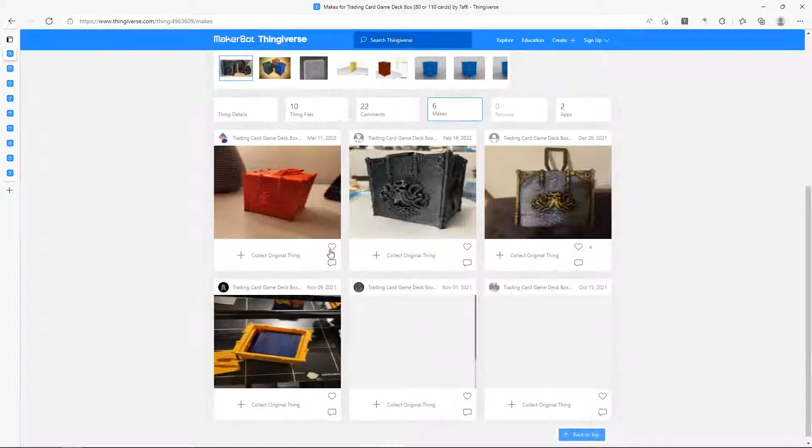So, anyway, we got this cool Cthulhu style one. This I thought was pretty nifty. It's a little briefcase. Oh, and this is the other reason why I have these up. If possible, I would like to have a section in our deck box for holding dice and chips and whatnot. So that is something to keep in mind for our design. One of our design goals, if possible. It's not mission critical, but if possible.

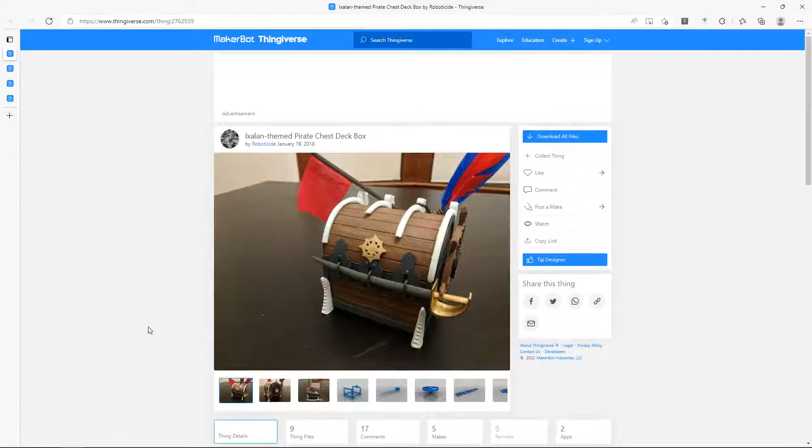I believe the Spellbook also had cutouts for your thumbs, if I remember correctly. It did not. Okay. Oh, it did. Sorry. It did right here. This cutout right here so that you can get to it. So that's something else we might need to think about, although the way I'm thinking about it, and we'll get to it when we look at the other ones, it's not quite the same, and probably not going to be an issue.

Here's a nice pirate deck box one. And this is, for example, one of the reasons why we may not have an issue. You see how the cards are sticking up out of the deck box so you can grab them above the deck box line.

That may be what we're looking at when we make our own, but we'll see where that comes from. Here's a nice one. Little bit of electrical work in here, you know, just an LED. It's a nifty idea. It might be something we might want to look at, including some electronics, although again, that's not a mission critical one, so not very worried about it.

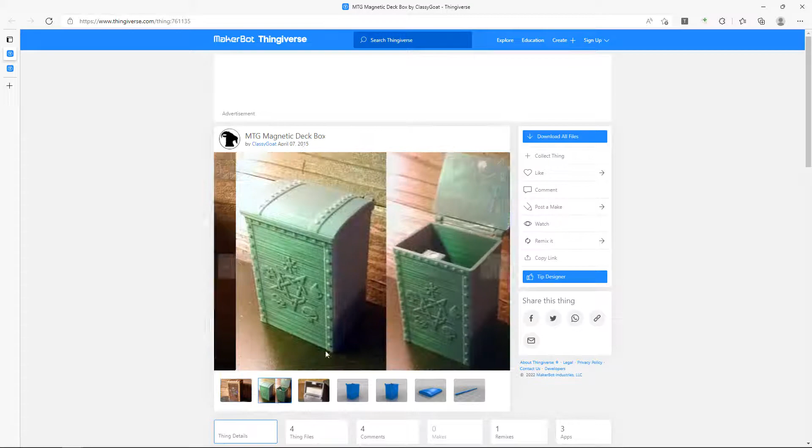And then I have this one up here, even though this is pretty simplistic, just because of two things. One, the magnet here to keep it closed. That's something we can think about. We can think about including magnets.

And two, one of these things with painting 3D prints, it doesn't always turn out well. This one happens to look alright because the design is wood. But I'm going to avoid painting our deck box because, frankly, in theory, we could do a wood type design for the 3D printed mechanism, but it's probably not going to happen. So I'm not expecting to be painting this.

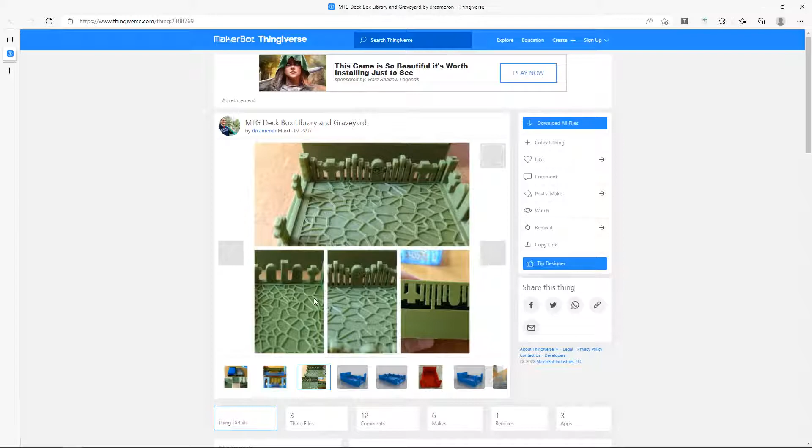And then I really like this one just for the theme. So over here, let's get another design. One, it pieces together into enclose, which is kind of nifty, but on the left hand side you have your library, and then on your right hand side you have your graveyard. So I thought that was a really nice idea. drcameron, I really like that idea.

If you're looking for a deck box that's simpler, by all means, I'd consider. I mean, if I was going to print one and not make my own, I'd print this one. This one is, I think, a very aesthetically pleasing deck box. Not as intricate as, for example, the Cthulhu one. The Cthulhu one would probably have been my second print. But it's functional while also being aesthetic without being overbearing like the artistically designed one.

So those are those ones, and this is the one that we are inspired by. I don't know if this is the exact print that I printed. There is a redesigned one that's a larger size. I may have printed that one, but this is what inspired me. I saw this one, I was like, ooh, this is cool and nifty, and then frankly I printed it out and was a bit underwhelmed by it. But this is what we're going off of.

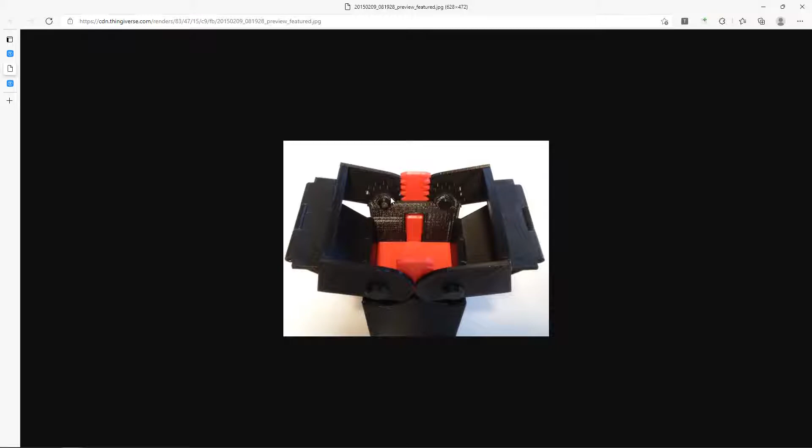So as you can see, what's the best picture? Yeah, I have this one up just in case it was a little easier to see, but I don't know that you necessarily, because of the black, are able to see it as well. But basically, the lid has gears on it. These gears drive this rack, which in turn raises the deck up out of the box. It is a nifty design. I do like it. It's just a little underwhelming compared to what I was looking for.

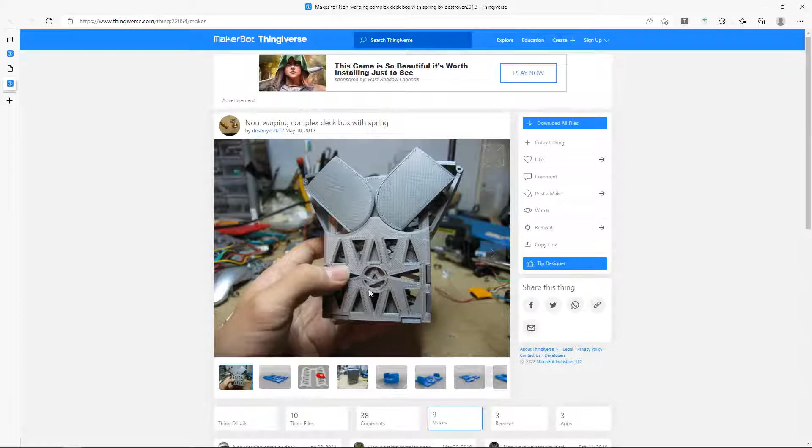And then the last thing here is this one, which I wanted to include because this is probably how we're going to be doing the outer case. We're going to have some see-through parts so that you can see the mechanism working, because the problem I have with this guy is that you don't really see it functioning as you're opening it up, which takes away from it. So this guy, on the other hand, you can see it functioning, which is nicer. So that is all our prep work out of the way, just giving you an idea.

Whoops, ignore that. I'm on desktop right now. So, oh, and I haven't opened up Fusion. So you're gonna see everything on the desktop. Let's see that desktop instead. So Fusion. Just getting Fusion open because I forgot.

Taking a drink of the coffee. Interesting thing is, I'm looking at my stream. Well, not my actual stream, but the preview. Give me half a second. I'm curious whether or not my music's actually getting through the stream. Yeah, okay, it is. My streaming software, I'm not seeing the music play, but okay, now it's updating. Now it's saying that the music's playing on my streaming software. Alright, cool.

Good deal. Now Fusion, where are you at? Why aren't you open yet? Alright, there we go. There's Fusion. Good deal. Now let's hop over to Fusion.

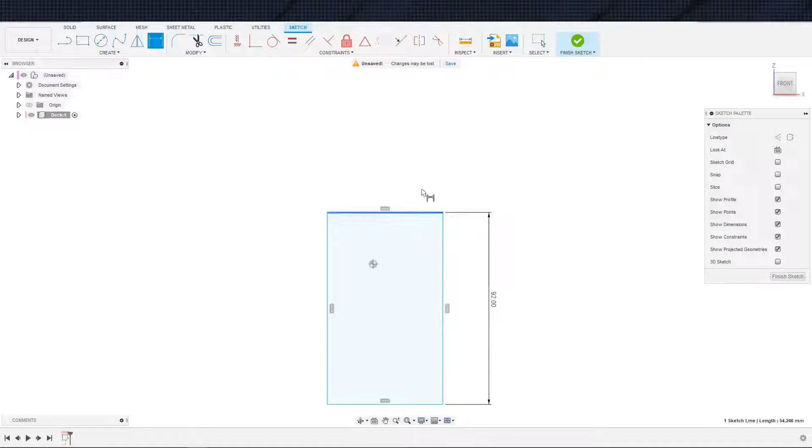A card with the sleeve, and I probably should know this from all the playing I've done, but it's been a while. So with the sleeve, I'm getting about 92 millimeter by, let's round that up to 66.5, and that was obviously height by, how do we want to do this? Which face do we want to start out with? I guess the front. So this is 92 by 66.5. Height by width, 66.5. And center this guy on there.

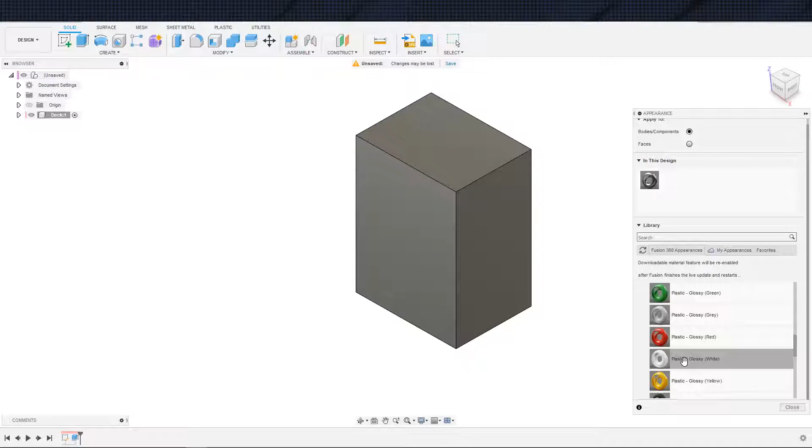And let's look at, so this is a standard 60, or yeah, Magic is 60, right? 40 is Yu-Gi-Oh! So 60 card deck, we're looking at 35 millimeters, let's call it 50 millimeters just for extra cards. So I'm going to have this deck proxy be 50 millimeters deep. And paper, do we got paper in here? No? Alright, I guess we're plastic today. What color do we want? Opaque. Let's do blue. Alright, there's our deck proxy. Step 1 achieved.

So a couple things to think about. Thickness of the gears. Do we want to do 3 or 5 millimeters? I'm gonna go grab something, 1 second. And let's hop over to the camera.

So here's the version I printed out. That is my EDH deck. It is an EDH deck as opposed to a Highlander or a Commander deck, because Commander did not exist when I made that deck. So 3.5 millimeters is what they made the thickness on these gears, it looks like. And there's just your example of how this one works. And that creaking noise is because I used paper clips instead of pins. I didn't have any brad nails, is what I believe they suggested. But as you can see, rack and pinion, lowers the floor, etc.

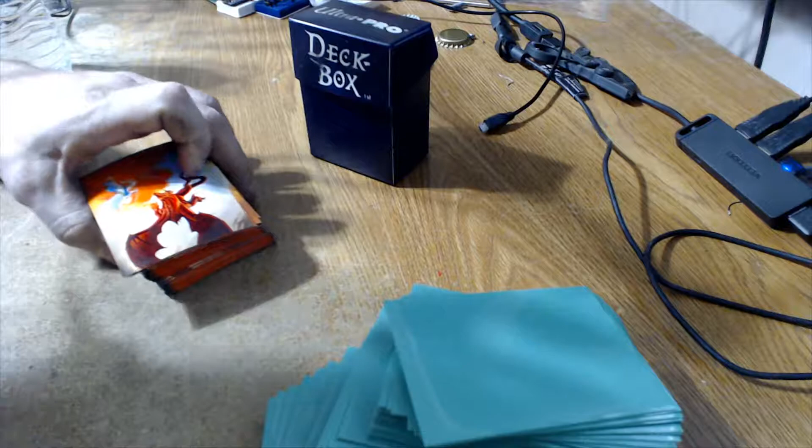So we said 3.5 is a good thickness for the gears. That's what the other one uses, and frankly they feel sturdy enough, so I will stick at, well, probably could get away with 3. Probably just round it down to 3 if we wanted to, but for right now, nominally, we'll be sticking with 3.5. So that is where we're at with that.

The next question is, let's make our deck box. How exactly do we go about arranging this? So there's 2 different orientations we can do, right? Three. There's three, obviously. Z, up and down, so having the deck standing up and down like the example is. Turn it on the side, that would be like the pirate box. The pirate box was on the side like this. And we also have it laying down like this.

I think that's right. Anyway, actually, the orientation that I'm thinking of is actually like this. Come on, click, click. Like that. And the reason I would use this orientation is because it is like a puzzle box. Puzzle boxes tend to be widest: longest measurement is width, second longest measurement is depth, and then the shortest measurement is height. A lot of them are in that rectangular shape.

And actually, while I have my EDH deck here, let me just double check the thickness of it, because this feels a lot thicker than what I said. So this is 55 millimeters thick. And what do we say for this deck box? 50. Okay, so I'm going to turn this to 60 then, to give ourselves an extra 5 millimeters.

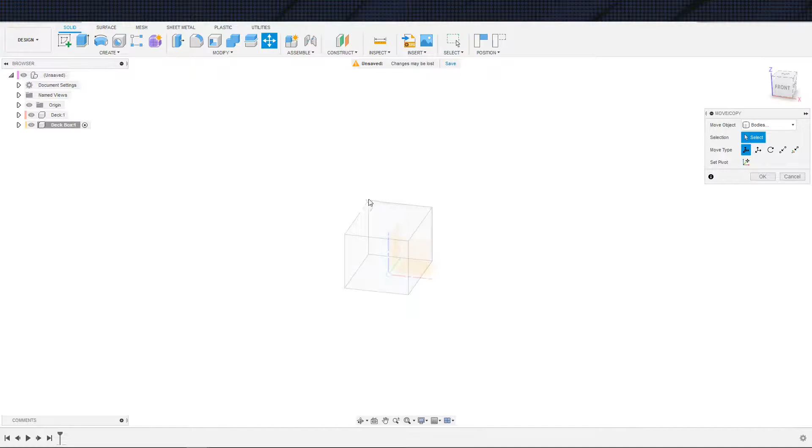Yeah, I think we're going to start off with the premise that this deck box is going to be oriented the other way. So let's align this. I guess we just grab it like that. Orientation. There it is. That's what I want. Alright, so this is now in the orientation that I'm looking for. No, it's not, I take that back. Let's rotate this really quick around the axis there, 90. That does not appear to be what I was looking for. Control Z.

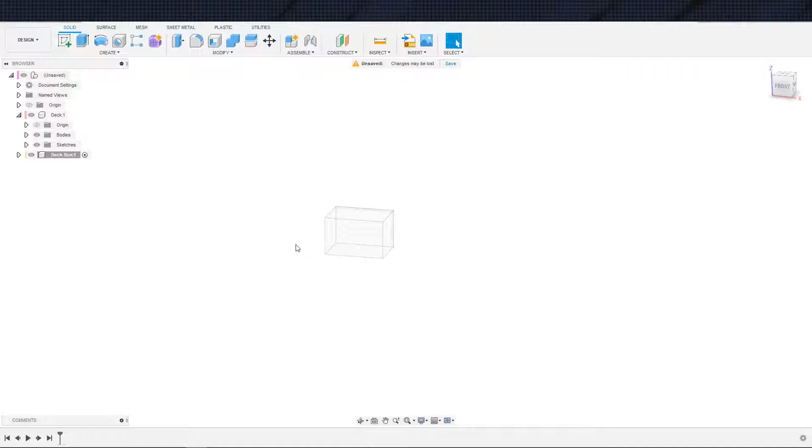Components. Select that. Around the axis. There we go. 90. Much better. So there's our front. And let's check the origin here. Its origin is still in the same plane as our main origin, so we are looking good. And capture position. Alright, so again, I didn't put much thought into how exactly we're going to be doing this one, so let's see.

So puzzle boxes very often have sliding sides, which are required to open up, and the slides block each other. And then I wanted to include gears and stuff for the mechanisms. Actually, those are two different designs, so we're gonna pick one, and I'm gonna go with the mechanical design. So let's see if I incorporate the dice chamber. Let's say I put the dice chamber on this side. Which way do I want to design it? I guess it makes most sense to do it on this side here.

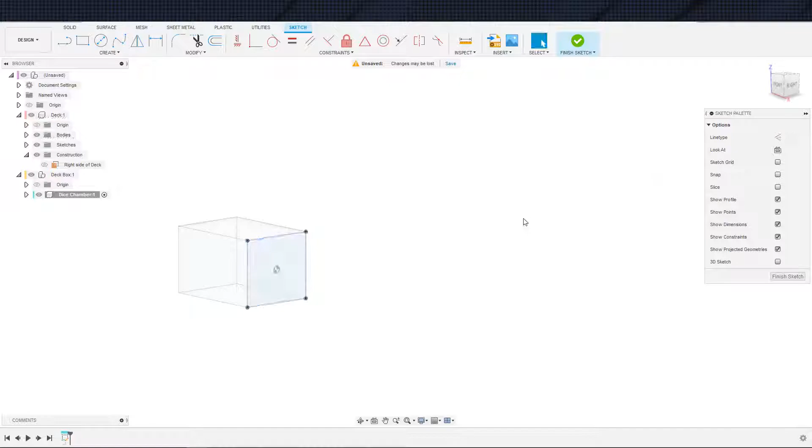Construction, right side of deck. Dice chamber. Excuse me, pardon me. And I am going to rough this out for the moment. I'll go with the opposing side measurement, which would be the 20 millimeters, if I recall correctly. So that is a rough out of the space we need. It's going to need a little bit more because it's going to need walls.

But I'm thinking if we use this to drive the mechanism, that might be cool. Actually, if we use this and then another thing, then we get back to the idea of the puzzle box without it being super complicated. So this dice chamber, I'm going to put a rack on, which is going to drive gears. The gears are going to move another wall out of the way, and then we can make this other side.

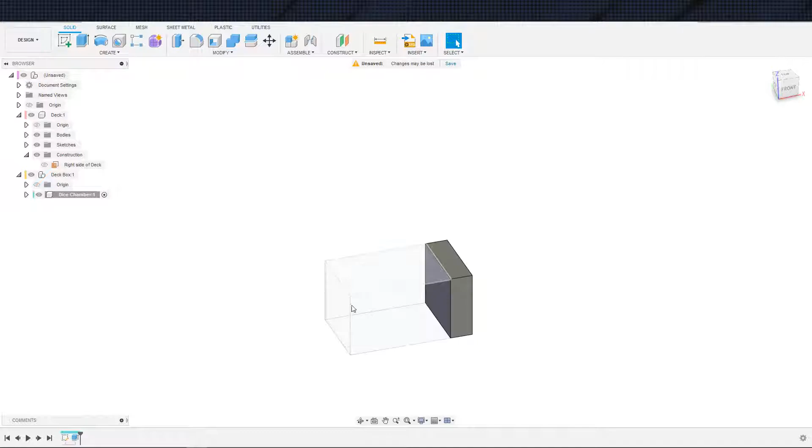So if this dice chamber is a rack, it drives a pinion. The pinion lifts the lid, which unlatches a gear on this side. The gear on this side we spin. So let me do that really quick. Spin top, I'm gonna call it for now. Left side of deck. Okay.

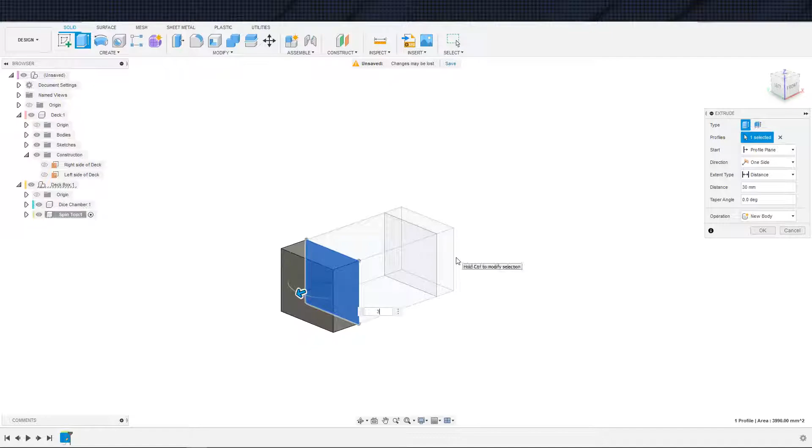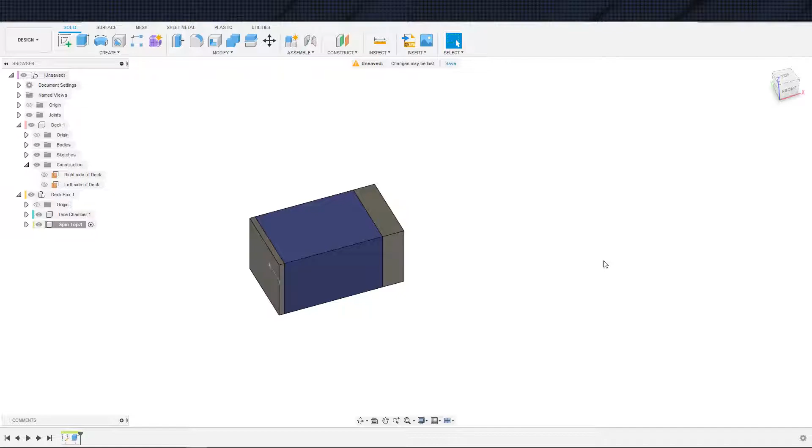Hop back over to the spin top and project that. I'm just gonna call this 5 millimeters for right now. And let me throw a joint in here, an as-built joint to keep things simple. Revolve. Turn the deck off. There. Okay. So once the lid opens up, we spin this guy, and that spinning opens the face of the deck box. Yeah, okay, cool. So that's going to be our layout for this guy.

Alright, so I guess it's just putting it together now and figuring out what has to happen in order to get it together. So, let's start making gears. This, we want to be a rack. Let's get back over to the dice chamber before I do that, because the dice chamber is going to be the first thing that we put a gear on. This is going to be a rack. The module, I'll leave it at 3. Let's make it 10. It's going on the side, so we don't have to worry about it as much.

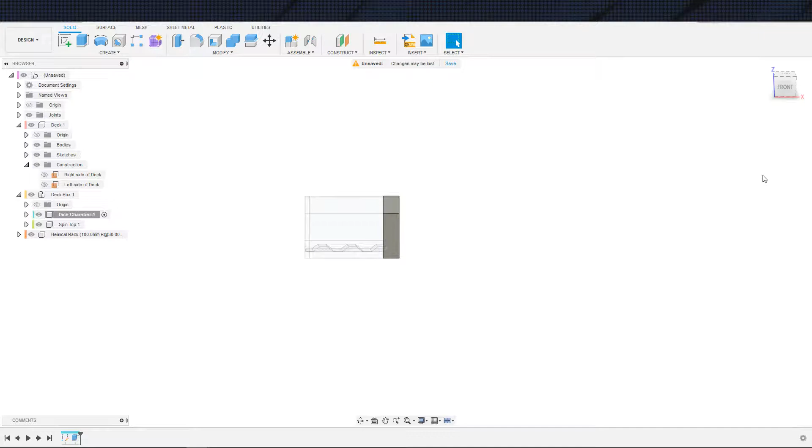Gear thickness, though, is going to be our 3 millimeters. I said 3.5 earlier. I'm just going to round down to 3. Nah, alright, fine. I said 3.5. And that, I don't particularly like the size of the teeth there. So, let's cancel, undo, create. Let's try that again. Height, length. Oh, the module. Okay, the module was huge. Right. Let's preview this.

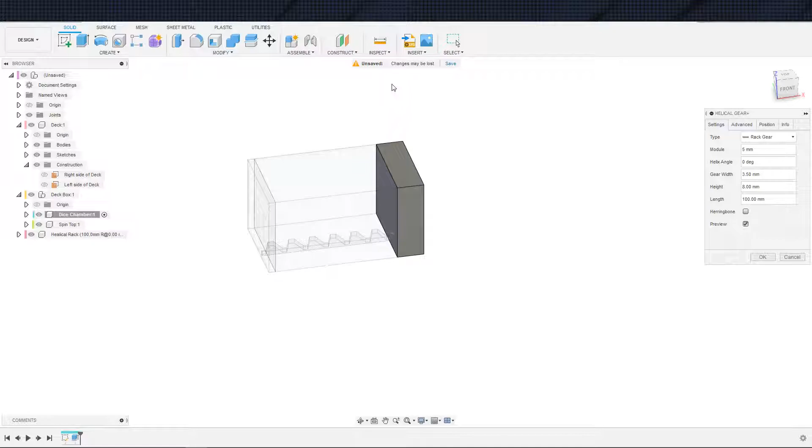What do I look like with a herringbone? Not particularly. And the helix angle, let's go down to 0. Yeah, we don't need a helix angle. The 8 on the height is fine. The length, let's see. The length is probably going to be the width of this, right? So that length is, check this really quick, 66.5. Yeah, sounds fine to me. We'll make that 66.5.

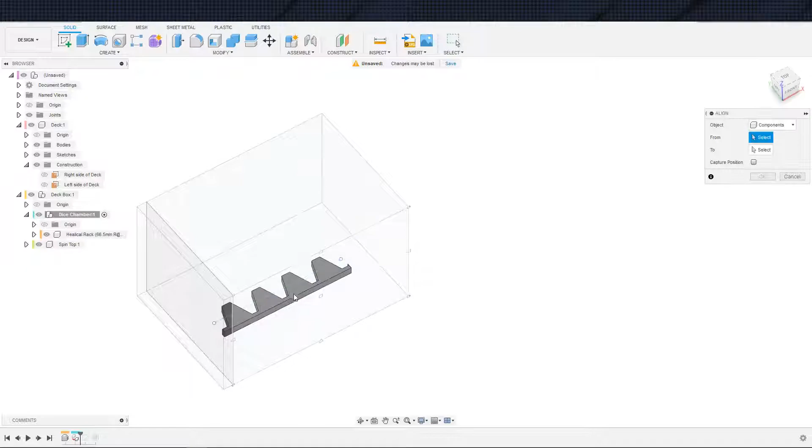Delete. 66.5. Okay. Get up here. And then we will rearrange this. Let's get this aligned. Turn off the deck. Let's get that aligned with the top of the deck. That side. Modify, align. That with the top. Okay.

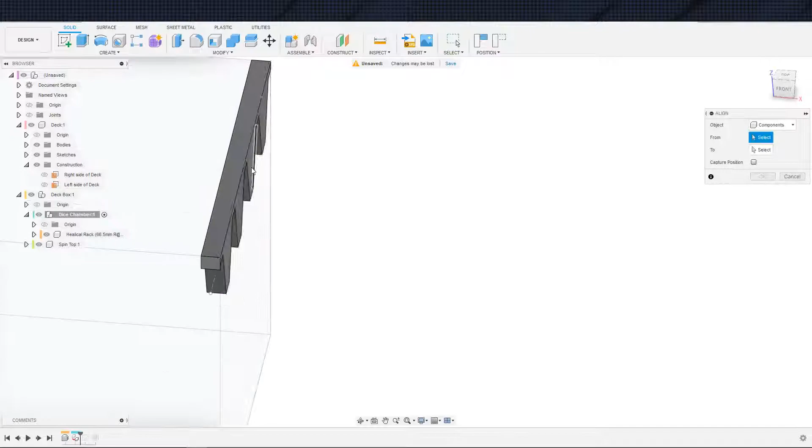Nope, not okay. Control Z. Modify, align. Actually, nah. Control Y. Modify, align. We'll just do this again. And go from that face to that face and hit the flip button. Alright, fine. You're going to be difficult. I understand. Modify, align. Top, top, and flip again. There we go. That's where we want it. I think that's where we want it. Actually, maybe not.

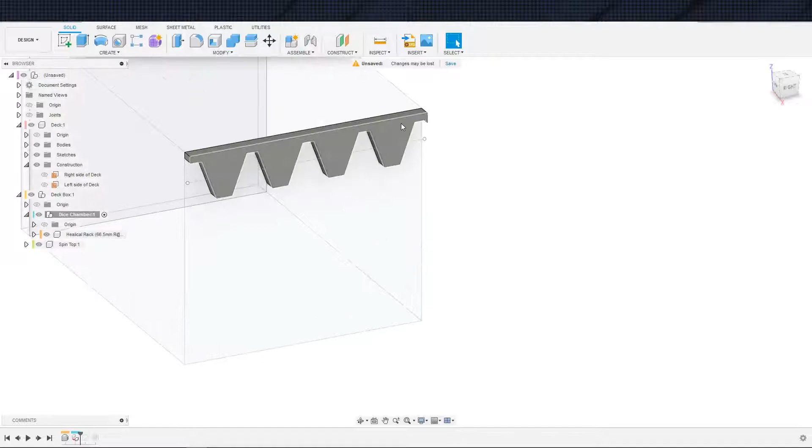Because I'm going to want to put a gear up here, and that gear is going to be driven. So let's create that gear really quick. Rack, external gear, and let's see. So we have 4 tooth on this guy. And we want this guy to move this lid 90 degrees. So it's going to be flat up here, and then it's going to be pointing straight up when we're done. So that 90 degrees is 1/4. So 4 times 4 is 16. Okay, yeah. So we can keep that.

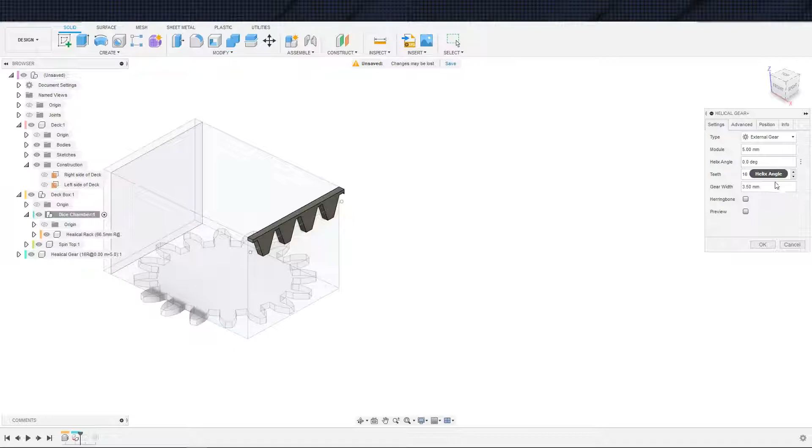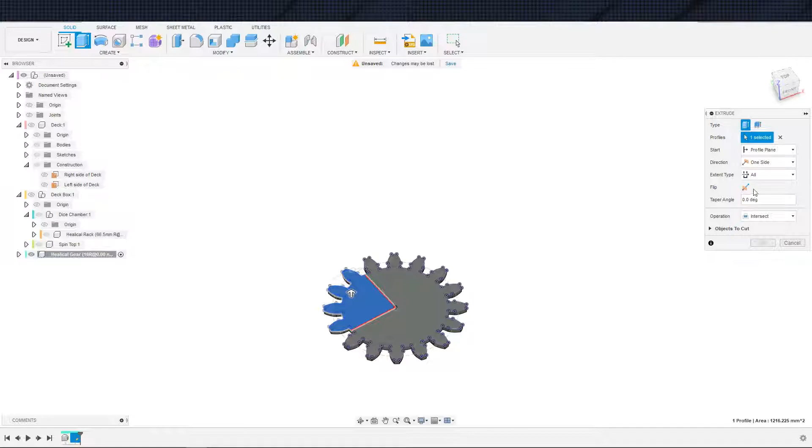And I don't know where this guy's going to end up. He's huge. Holy crap. Let's see if there's anything we can change about that. Well, we are only going to take 1/4 of it. Its module is 5, which is why it's so big. Alright, let's come down here and get this guy sorted out really quick. Turn him into 1/4, and we'll see how obnoxious it is from there. I'm gonna go here to here, and then, whoops, try that again. Distance all, and intersect, and flip the position. There we go. So that's our gear.

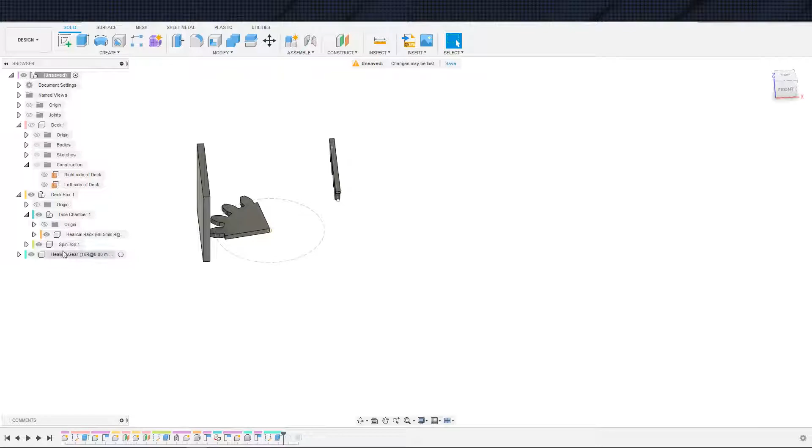Deck box, and this should be in the deck box. Are you in the deck box? No? Deck box? Alright, you're being difficult. Cut. Nope. Hop up here. That's funny. So I was able to put the rack in there, but not the gear. That is fascinating. Yeah, right. Whatever. Just gonna be difficult.

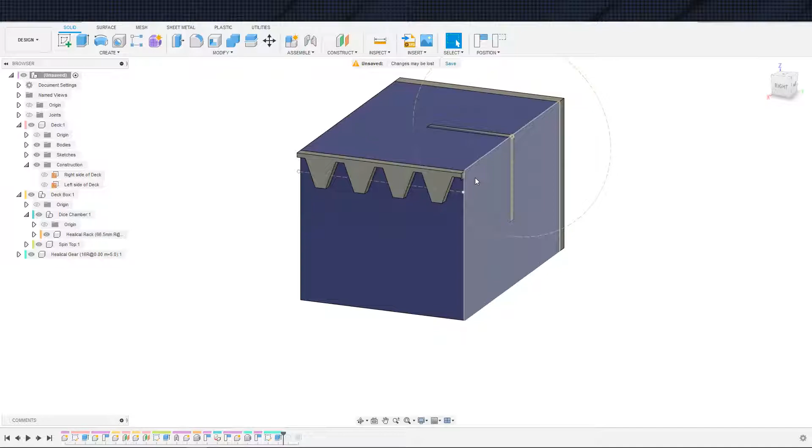So this gear is going to be down to start with, so let's align that down. Whoops, don't delete. Align gear down on the deck. And flip that guy. Nah, don't flip that guy. Modify, align, get you aligned with the back. Whoops, not that. Bodies, back, and now flip. Okay, and then we lined you up. Yeah, it's so big, man. Ha ha. Well, nah, it's not so big that it will be a problem, is what it comes down to. Because this will just kick everything over.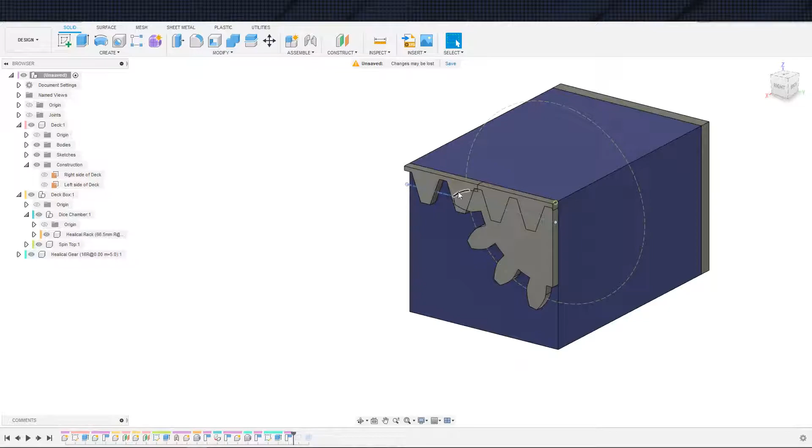Bodies there. And flip. Is this really fine? This is not fine. No, you are on the outside. Okay, cool. He's on the outside. Good. And then this guy. Let's capture position. This guy goes down the bottom. Modify, align. Yeah, let's align the top first. That to that. And flip. Okay. And then we can modify, align. That. No, that's not gonna work, is it? Nope, not gonna work.

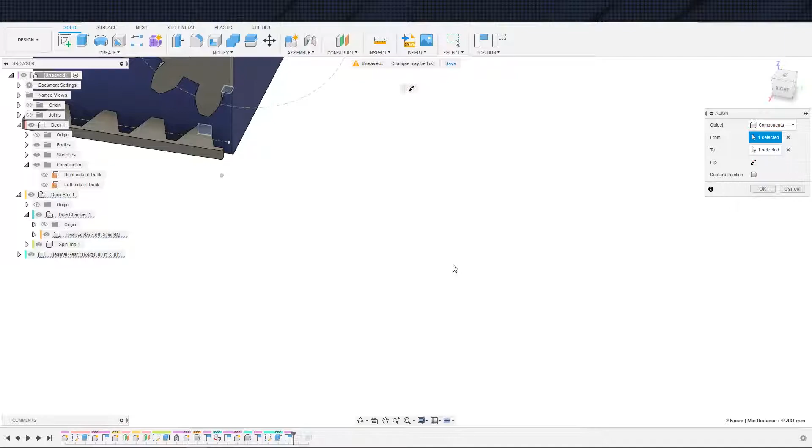Yeah, let's modify like this. Align to there. Dude, what are you doing? That's a flat surface. You should just align up to it. All right. We will manually move this. And how is this going to end up sitting like that?

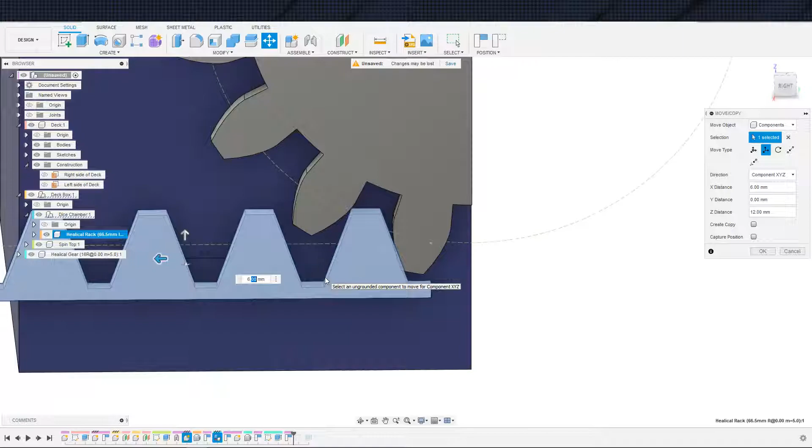.1 25. Are you clipping? I don't think you're clipping. I think you're clear. Yeah, you're clear. All right, cool. You can sit there then. Okay, capture position. Okay.

So there's that mechanism. Except that's not how that mechanism is going to work. Yeah, this is one of those problems with doing this on the fly without thinking through this. So obviously, when this goes that way, it's going to go down with it, which is the opposite direction. If this goes this way, actually, you know what?

I'm trying to think if we can salvage this. It may be a matter of making this gear smaller, the module smaller. Let me take a look at the module on the sample deck box, just because it rolls really nice. Alright, module, sample deck box, is only about 3mm. So yeah, these are way bigger than they need to be. So there's a couple things here.

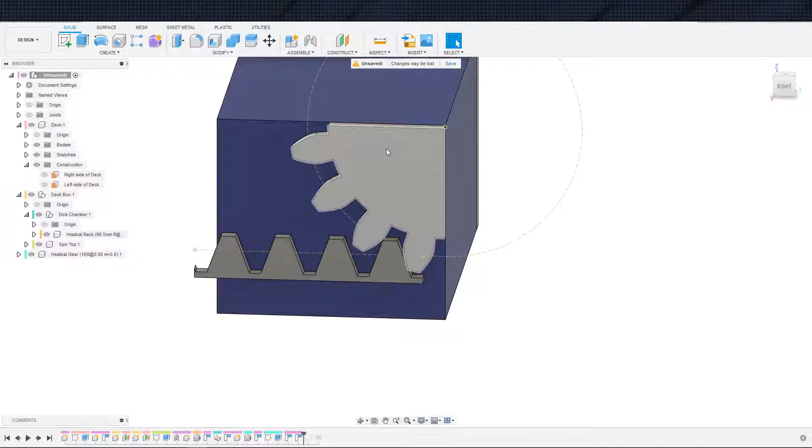That's the way we could do it, but rather than add more gears to it, I think I'm actually just going to have the back open instead, because it doesn't necessarily matter which face opens first. Plus, if the back opens first, it hides the deck until you spin the lid and get the rest of it open. So yeah, I think I'm actually cool with this.

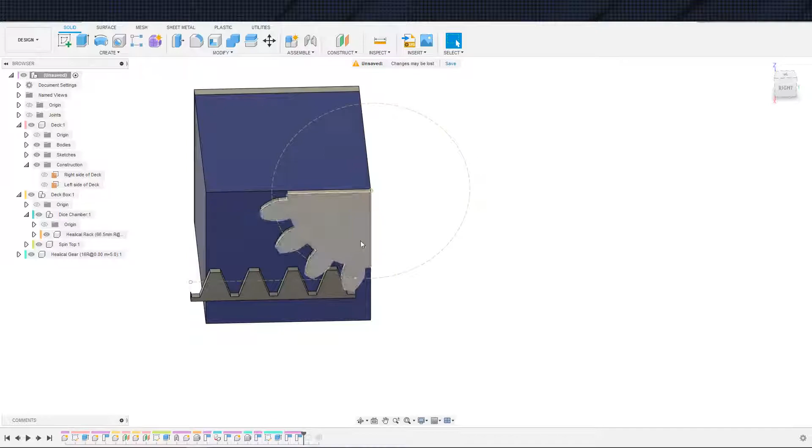So I'm going to leave this rack full size for right now. We may cut this rack down depending on the overall dimensions of how that box ends up being. So the only question now is, obviously this needs to get mounted, and we can mount it with a regular thing, but then there needs to be a wall on the other side.

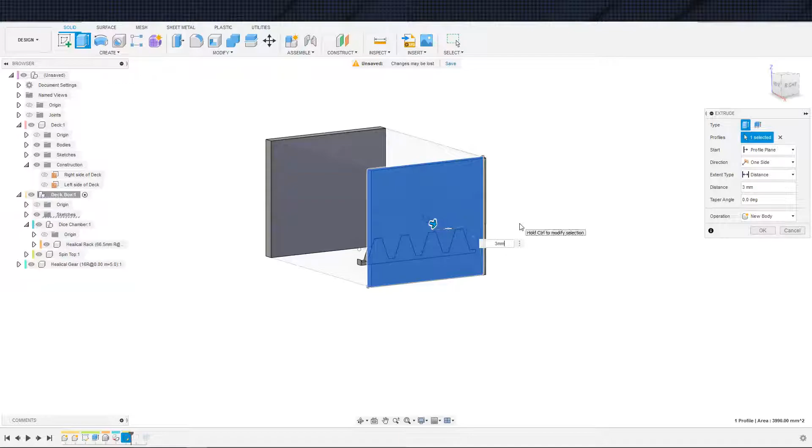So we're going to come back to deck box here, use right side of deck, okay, use that, and put a temporary wall in, and I'll just keep it at the 3mm like I like to do. Okay, and then we can go ahead and realign this stuff. Modify, align, turn the deck off, or deselect the deck. There we go.

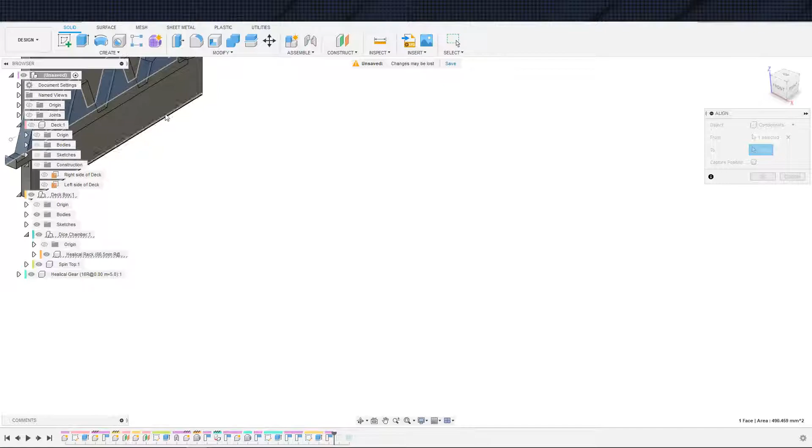Let's grab that guy, move him out. Okay, capture position, modify, align, move that guy out there, capture position. Alright, there we go. And that, whoops, I did not hit OK. Modify, align, capture position, OK.

And we can come back over here to deck box and throw that little pivot hinge in. Call this right side of inner case, because we will almost certainly have an inner and an outer case. So project, okie dokies. Toss this in here. We'll make this, I mean, 10 is fine. It's one of those things. Bigger is, well, you know.

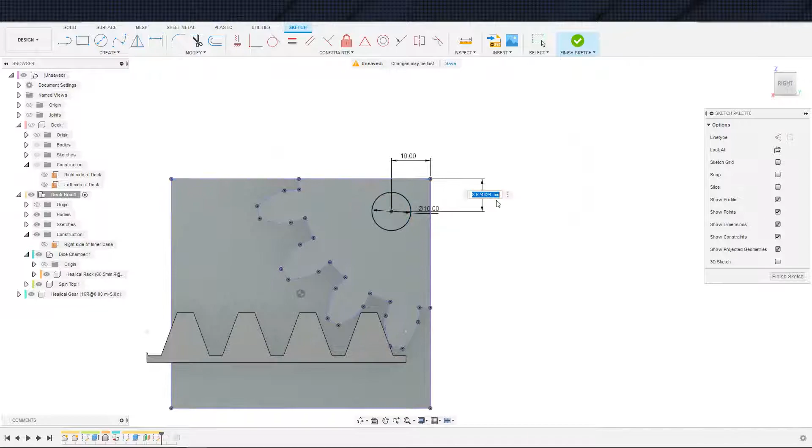Keep it simple. Turn you guys off for the moment. Project you, distance to object. Helical gear. Not actually a helical gear. Join. Combine, that, cut, keep tools. Hop back over to here.

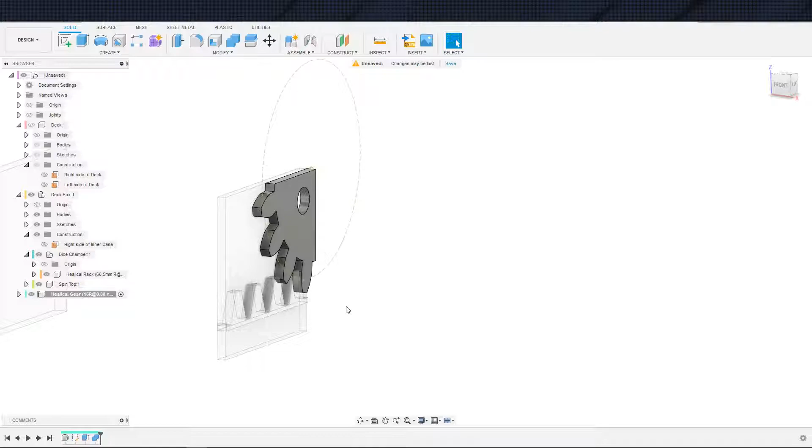Offset face, minus 0.1. I want this to be a little looser than normal because it's going to be a sliding mechanism. I don't want it binding up. And that is that. Cool. Alright, I'm going to throw a joint in here so that we can start working on this stuff. That and that. And turn the deck box off for a second. Get the center of that. Okie dokies.

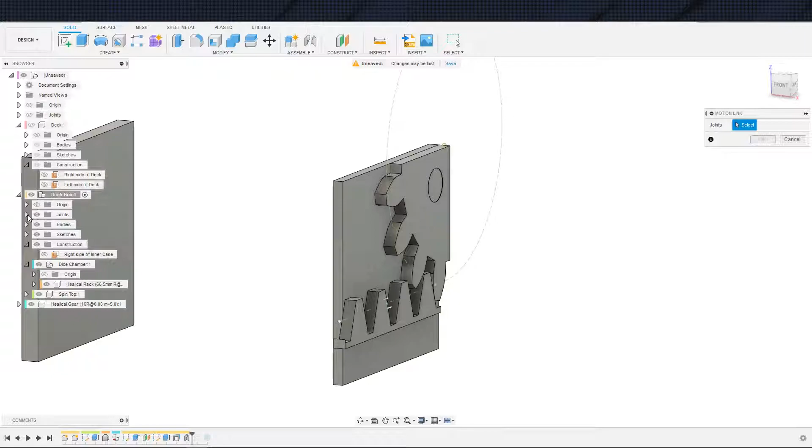Modify. Or let's throw an as-built joint in. That with the deck box. And that's going to be a slider along that line. Okay. And then we can throw a motion link between those two. That one and that one. And it is one of these things where 90. It's one of those things where that's going to need to be fine-tuned just for the animation purposes.

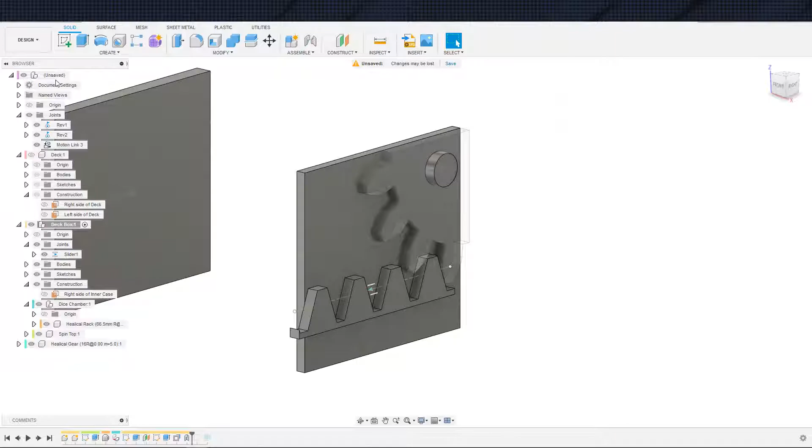So I had this in my mind. Yeah, this has to go that way. So let's hop up here, find that motion link and reverse it. Okay. So that goes that way. And again, the actual distances here will have to be tweaked for animation purposes, but at least we have that together now.

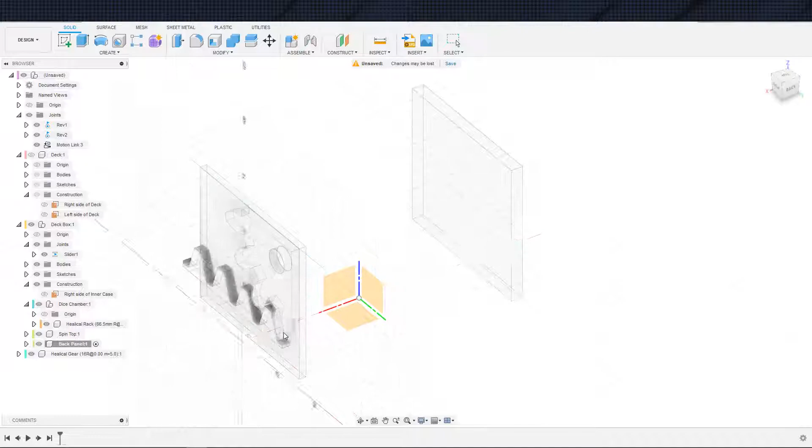Now, let us make another component called the back panel. And that's what this gear will be attached to. I'm going to go ahead and, let's see. So the inner case could be open on the back. We could have the inner case running underneath around to the other side to connect to the other side. But I think I'm going to go ahead and throw a connection between here and the other side on the inner case. So the inner case here will connect to the other side also along the back.

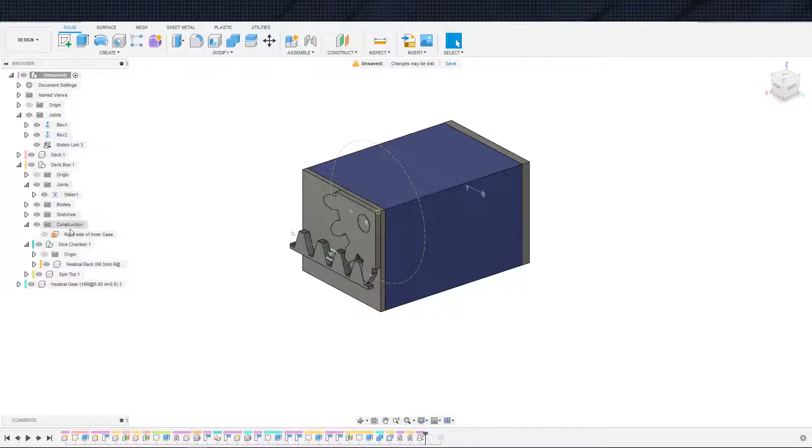And the reason I'm doing that is so that the deck, when this flap opens up on the back, does not fall out the back. So that's why I'm doing that one. So in which case, let me go ahead and put that in right now. Deck box. Do we have? Okay, so the deck box, I should probably move this to another component, just because we're going to have an inner and outer case. So let us now get this drawn out and deck. Throw another construction on there. Okay. Back of deck. Back side of deck.

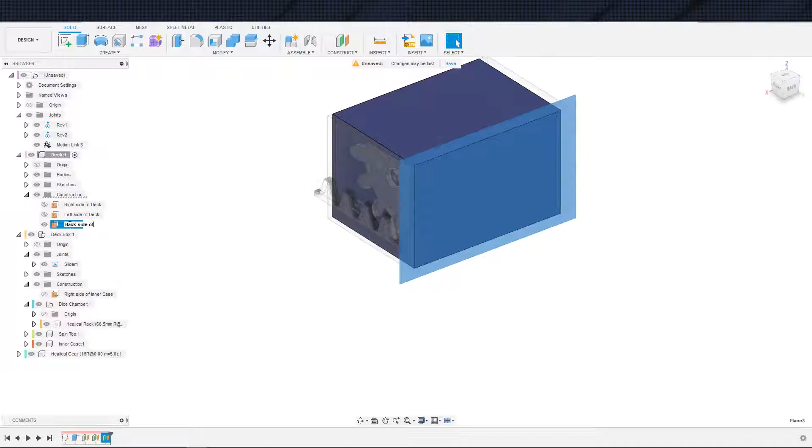Have you ever seen the back side of water? How many people know that reference? I guess we'll find out.

And project that too. Okay. Turn some stuff off so that we can see what we're looking at. Yeah, that is in the wrong component. So let's hop back in here. Inner case. Hop onto the back side of that. Reproject those. Actually, I'm probably just gonna keep that as is. Let's turn these guys off for now. Okay, turn you off. So we'll just turn these sketch lines into construction lines and then just extrude like that. Brain no work. Okay.

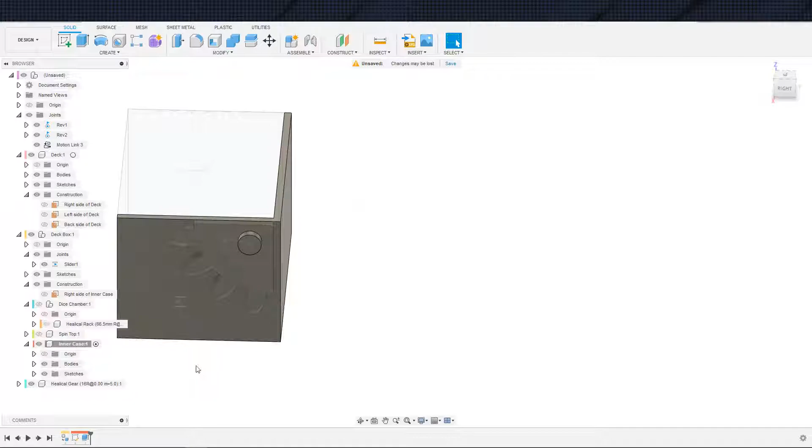And back to, I'm thinking of hollowing this out right now. We'll see what happens. I'll take a look at it, revisit that question. Anything else I wanted to add while I'm in here? I don't think so. So let us, yeah, so that needs to be realigned. So let's back up a little bit here. This stuff, all three of these need to go. They're not going to let me, are they? Yeah, they're not going to let me. Okay.

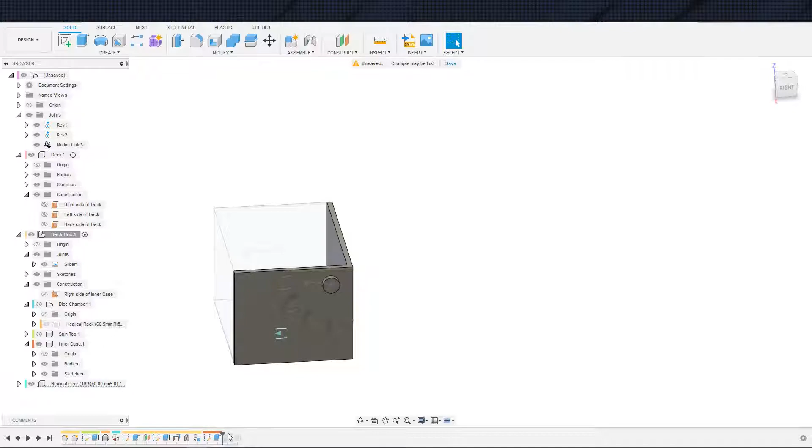Ways to fix this. Alright, so the simplest way to fix this is just to hop in here and extend you. And distance to object there. Okay, join. Alright, it's fixed. Not the prettiest looking thing, but it's fixed. The other way is just to backtrack, delete a lot of the joints and whatnot that's stopping me from moving this backwards. It looks like this component is blocked by this joint, so I would delete that and see if we can get there otherwise, and basically realign this pinion to the back and then re-put the hole in it, etc. Get us caught back up, but for now I will not be doing that.

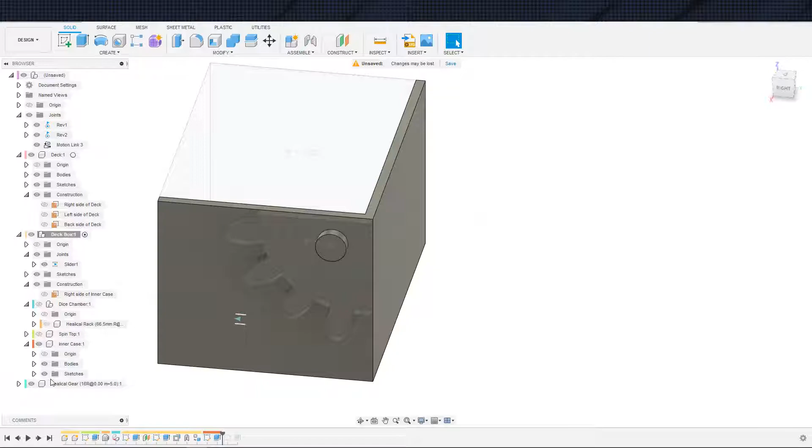And now this gear, I'm thinking is technically part of the outer case, just because it's going to be the second wall that opens up here. One of those things, it's not letting me move it right to anywhere else, so there's not much I can do about that. Yeah, I'm gonna go ahead and make the outer case component, outer case, capital O.

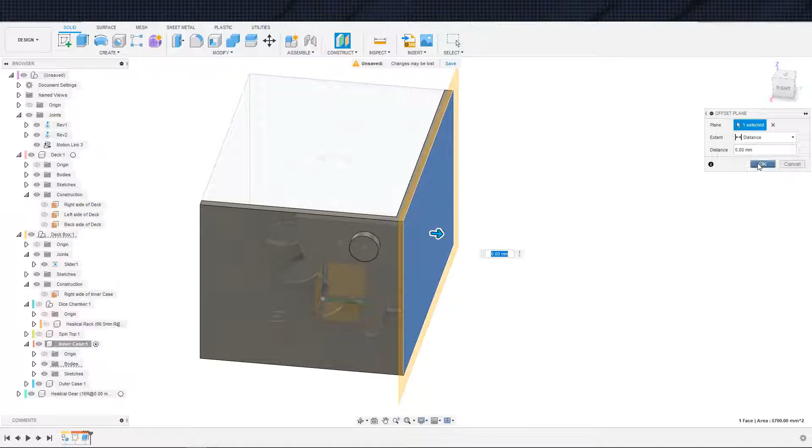And we are now going to inner case, construction, and draw in the outer case's back wall, which is lifted by this guy. Back of inner case. Okay. Outer case. Draw. Back of inner case. Project all this stuff. That end. That guy. Okay. Turn a bunch of stuff off, so we see what we're looking at.

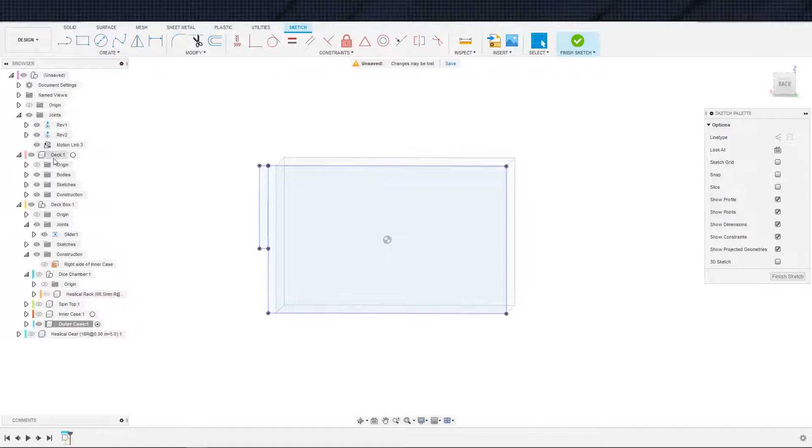Okay, and then I'm going to... Last time I just turned off the center lines. This one I'm actually going to go ahead and redraw a new box, and this is going to be the locking mechanism that stops the top case from rotating, which means that it should extend out a little bit.

And now the question is how exactly. I guess I will include that here. So let's do 3.5 millimeters. Actually, it's going to need to be more than that, and I will show you why. Let's hop back over to the inner case. Not redraw this back wall. Before we draw this back wall,

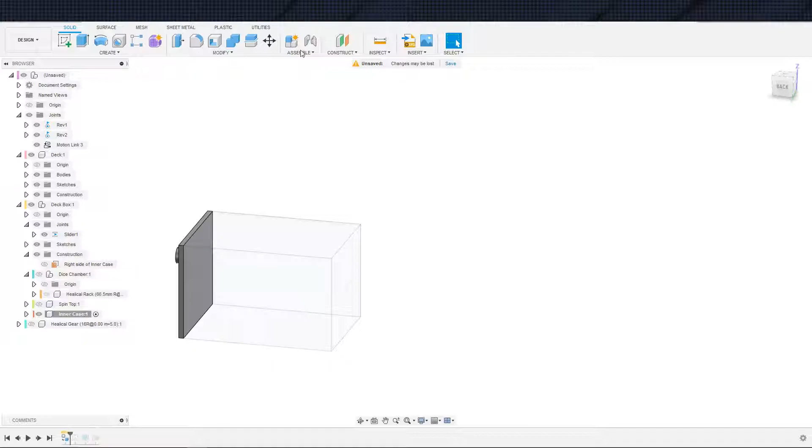I am going to turn the inner case on, turn the deck on, draw in the opposite side here. So deck, we should have a left-sided deck, yep. So let's draw that guy in. 3 millimeters. We are in the inner case, so we're good there. Stop. Project that guy. Okay.

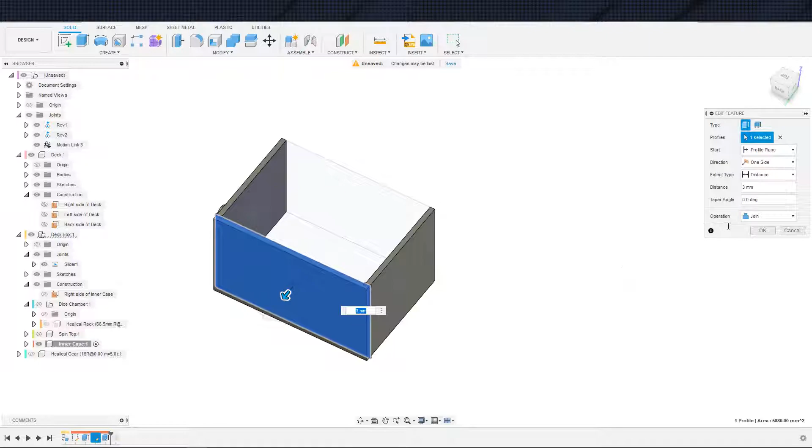And we'll just do the same thing here. Turn these guys off. Turn those guys off. Finish. And now on this next thing, we should join to the other one as well. Cool. And now we can hop back over here. Let's come back up top to make sure that we're getting all the way to the end. New component. Draw. Alright, cool. That's what I was looking for. So let's turn that guy. And now we will...

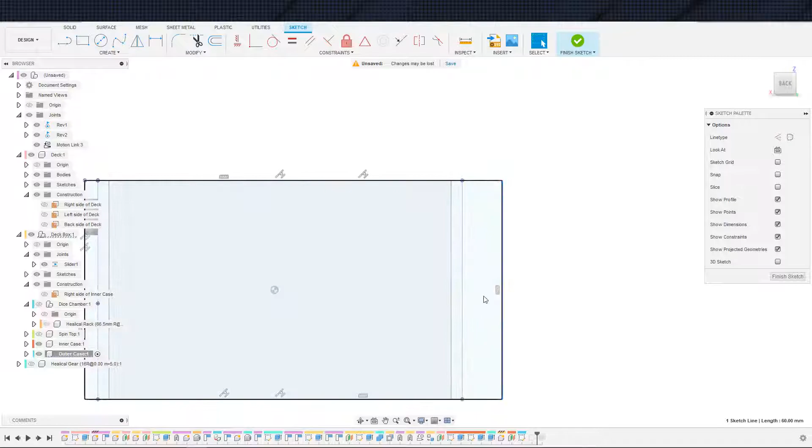So the question is, what do we want to be visible on this spin top? So in other words, I guess we go like this. Okay. And the spin top is going to have to hook into the inner case somehow. I believe it may be more than 3 millimeters. I'm going to call it 3 millimeters right now. So here's the inner case right here, and then I'm imagining the spin top being right here, and it's being blocked by this back wall, which is why I can't move. So we're probably good there.

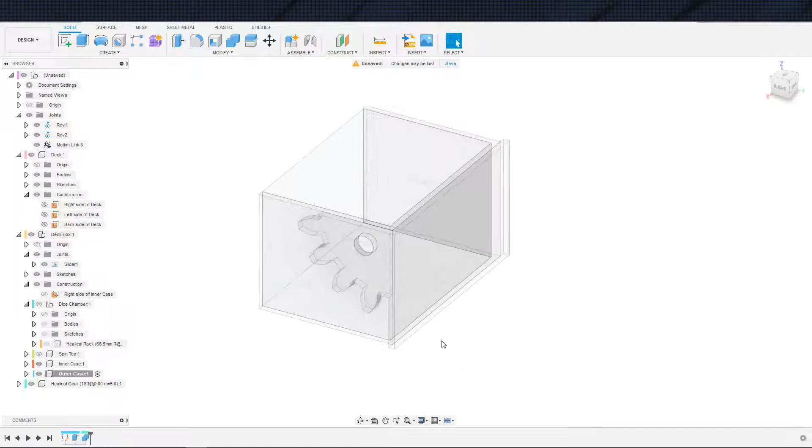And then we... outer case. Oh, I never actually extruded it. That is why. 3 millimeters. Helical gear. Join. Oh, I guess we can't join just yet, so new body. And now I'm going to have to join it like this. Those two. Join. Don't keep tool. Okay. I guess we got to join it the other way then. Join that one plus that one. Okay, there we go. So there is that.

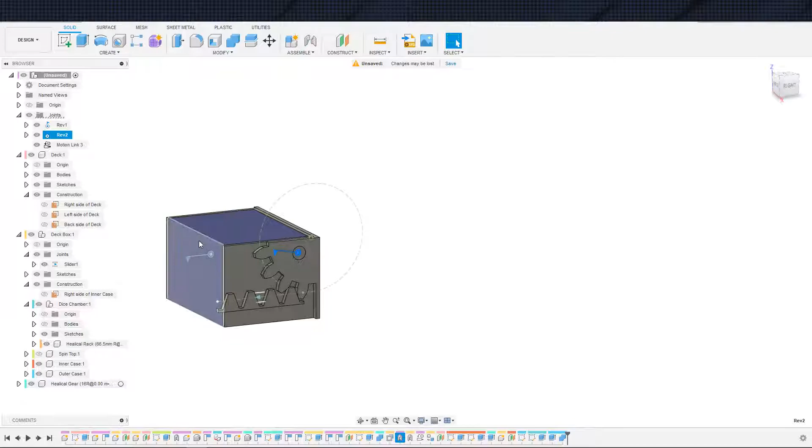And let's look at what we got so far. Turn you on. Don't turn the bodies on there. So we got this. Oh, I'm gonna have to redo this joint right here. So let me just delete that joint altogether from the history bar because we don't need it anymore. Yes, delete. That does get rid of our motion link. We'll just redo that as a revolute joint. And that guy and that guy.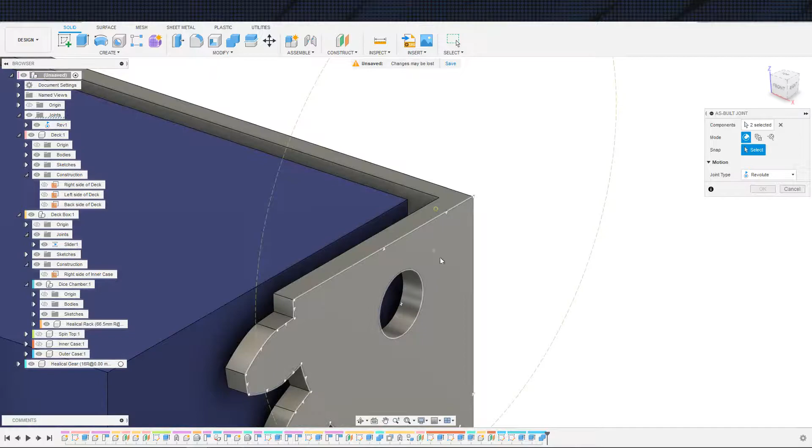And turn off. Deck box, inner case. Turn the inner case off so I can see this. And you are a revolute. Pew pew pew. Oh, this is funny. Did I not select the right one? So select that. Select the inner case. There we go. Oh, there it is. Cool. Okie dokies.

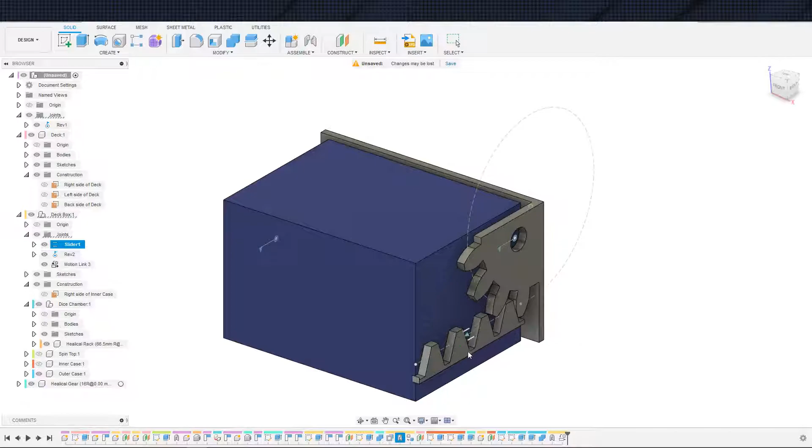And then modify. Or not modify, motion link. We're going to link that guy and that guy. The angle is going to be 90, not 960, 90. And the distance, let's see what happens here. Well, reverse it like we said last time. Okay. It's honestly pretty close. Nice. I'm pretty sure back to this is 66.5, right? Yeah, 66.5. So that probably just needs to be 66.5, okay. It's not quite right. Whatever. Close enough.

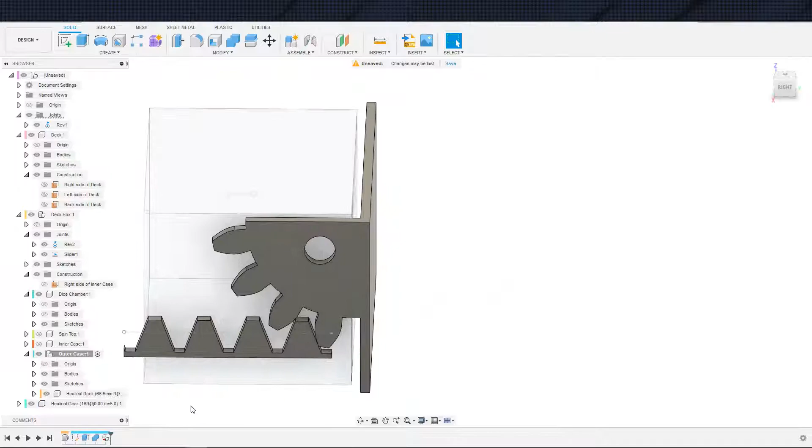And let's see, so that gets that there. I will have to do the outer case wall here. Let's do that now. Outer case, and this helical rack should be inside the outer case. And let's see, how do we want to define this? Outside of gear, I guess. Makes sense. Side of gear.

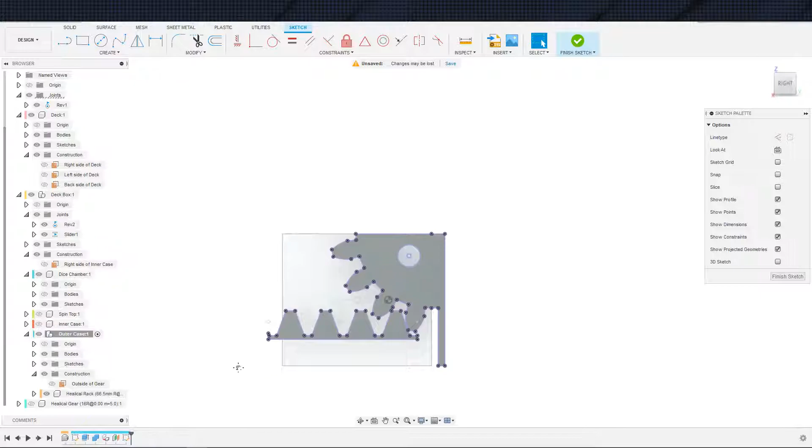And let's get some drawing done. Include that. Include that. I'm not on project tool. Cool. Alright, so that and that. And I can honestly turn this helical gear off forever because it is no longer part of the design. Bodies, bodies, and then turn the other stuff off. Deck box. Whoops, not deck box. Dice chamber can go off. Deck can go off. And I think we're good.

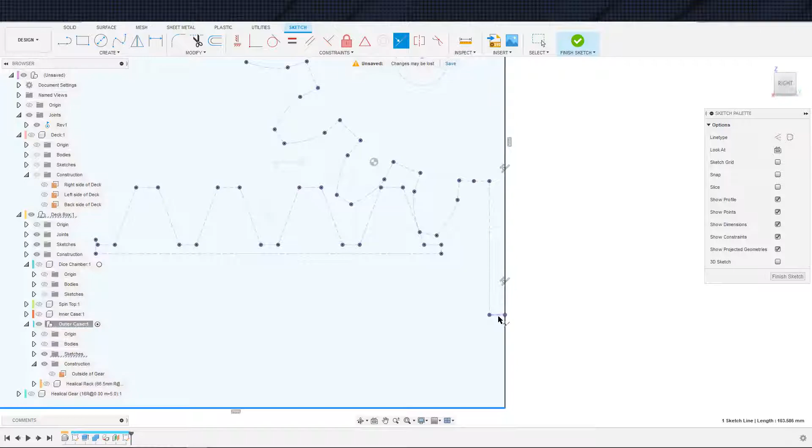Cool. So let's do this, and then I'm gonna toss this guy in here like last time. And that should line up there and there. And that should line up with the bottom of the wall there, for right now, at any rate. We'll see what happens in the future. We may have to add on there. And for right now, I am going to project in the deck.

And I'm going to set this guy, whoops, set this guy for 3mm, assuming that we're going to have a front wall here. And then we can go 3mm there. Turn the bodies back on. Turn the helical gear on. And turn that guy off.

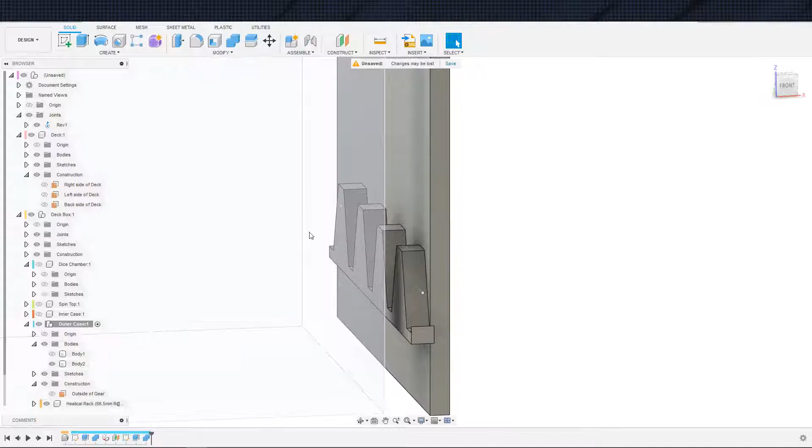And we will combine that and that. Join. Unless that's not actually touching, even though it looks like it is, which it may not be. So modify, align. I don't like the fact that I have that point picked instead of the face. That. Huh. Oh, it did join. Awesome. Okay. Cool.

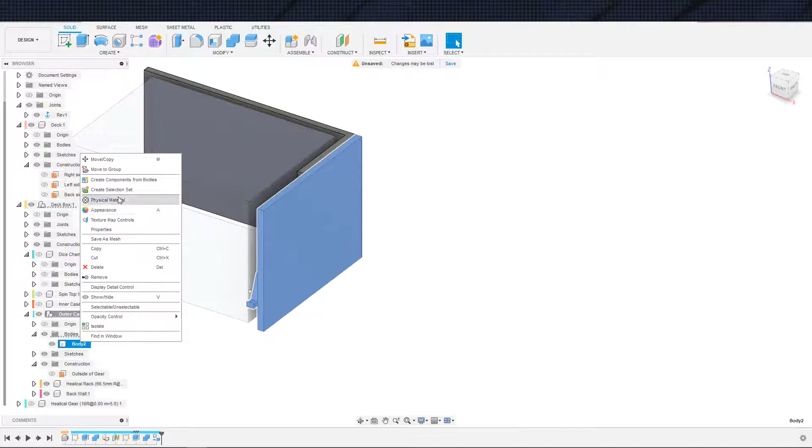Alright, in order to keep the animations in here, we're gonna have to split these guys off to their own components. I'd prefer to do this as part of the body creation, but I didn't think of it, and therefore we're gonna have to just add a timeline object, instance, whatever you want to call it, entry, right side wall. Okay, and all our motion links and joints should be gone at this point.

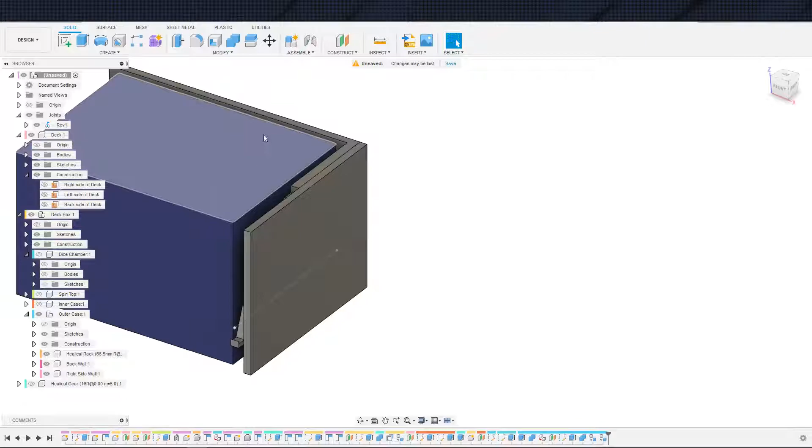It looks like they're still there. Let's see what happens. Yep, not working. So let's go back and reestablish these guys. Delete that guy. Yes, it will delete our motion link. Delete that guy. And then modify. As built joint. Boink, boink. Actually, I shouldn't have deleted the revolve. Yeah, I shouldn't have deleted the revolve. As built joint.

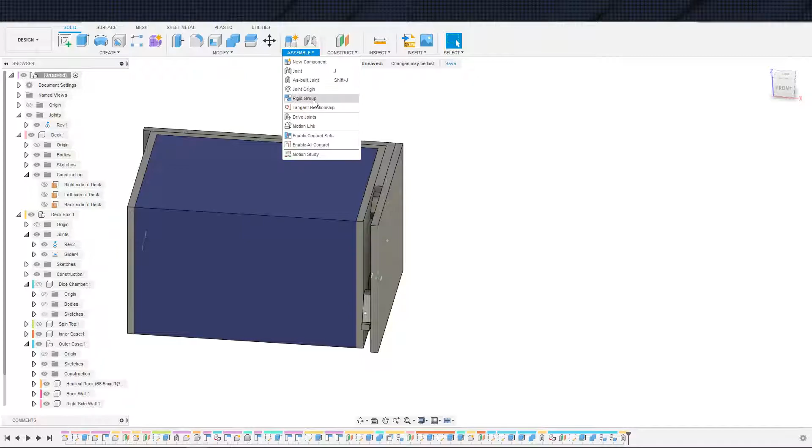Slider. That on the inner case, I think. And we'll still use that construction line. Okay. And then we will motion link. Slider. That guy. And we said 66 was good. And 90. And the back wall's not moving anymore. Reverse. Okay. Alright, so that is not the right... Yeah, delete. Alright, that is something that will be fixed in the future.

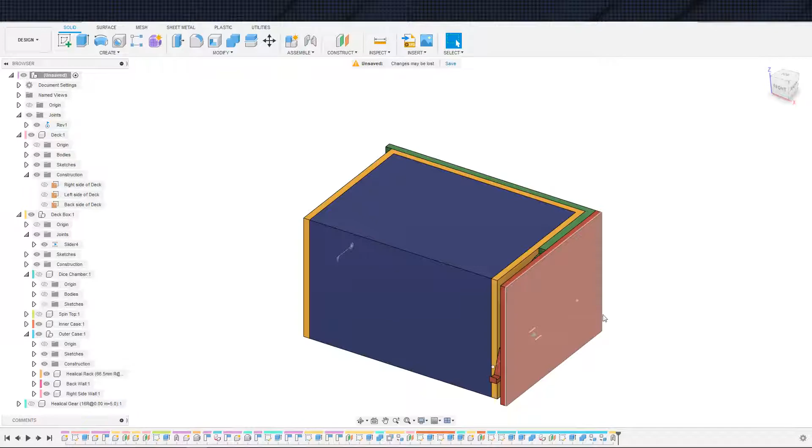So, this has been fun and interesting. Again, just a reminder, this I am going to be hollowing out so that you can see the mechanisms. I think that being able to see the mechanisms at play is a bit more interesting. The puzzle box aspect of it would suggest that you don't see anything and you got to figure it out yourself, but this is not meant to necessarily foil anybody and stop them from playing Magic. This is a fun little knick-knack, a cool boutique deck box, and the point of it is to, frankly, be inspired, impressed, etc. I'm not trying to say that you're going to win over any friends showing off your deck box, but it is a nice little knick-knack to look at, and therefore we're going to be hollowing those sections out.

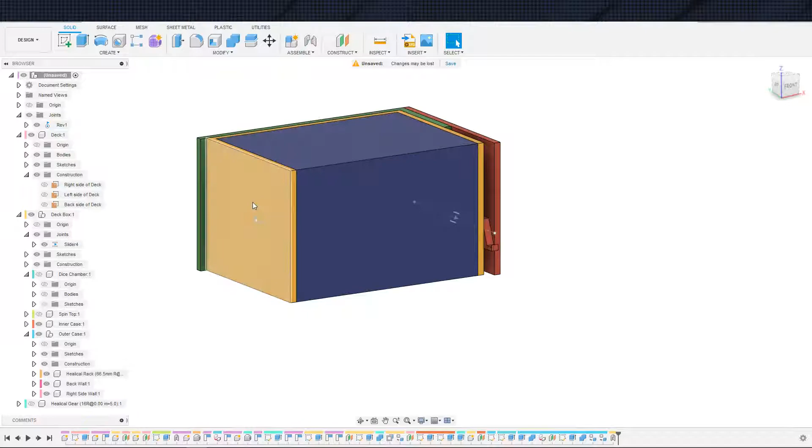Probably before we hollow out the sections so that you can see the mechanisms, we'll add in the spin box here. And then from that point on, it's just adding in the other aspects of the box. For example, the dice chamber over here will get added on the side. The top and lid, etc. That will be added on as part of developing the spin box mechanism. So that is basically what we have yet to do. So yeah, that's the plan for next stream.